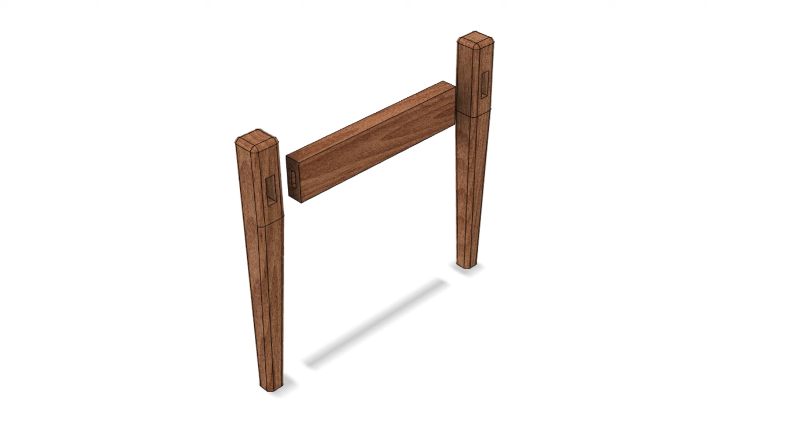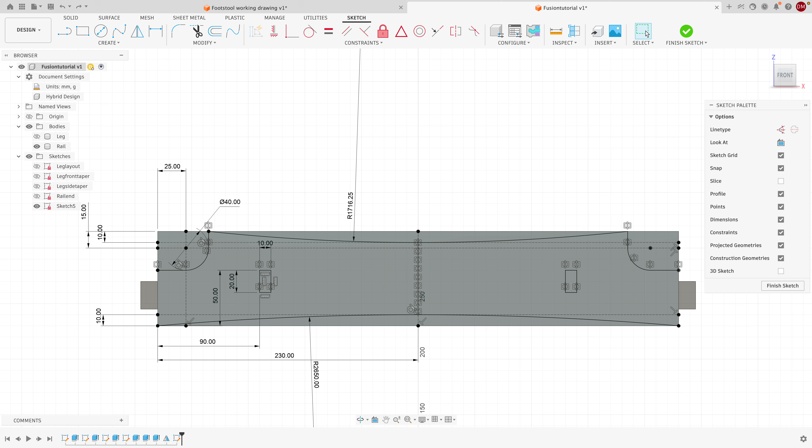In this tutorial, we're going to sketch the geometry for the front rail and for most of the back rail. By the end of this tutorial, your project, or at least this part of it, should look exactly like this on the screen.

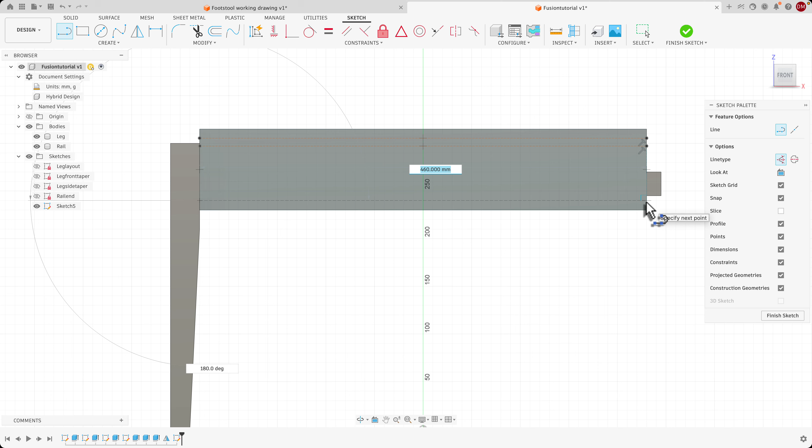So we're going to start off with a new sketch off the front face of the rail, and we want to start off with some construction lines. L for line. We want to go all the way across the rail, but we also want all of these lines to be either horizontal or vertical, so we're looking for 460 millimeters in length and at 0 degrees, or sometimes you'll see 180 degrees, so either 0 or 180. I've got two going across the top, one towards the bottom, and a vertical one at this end.

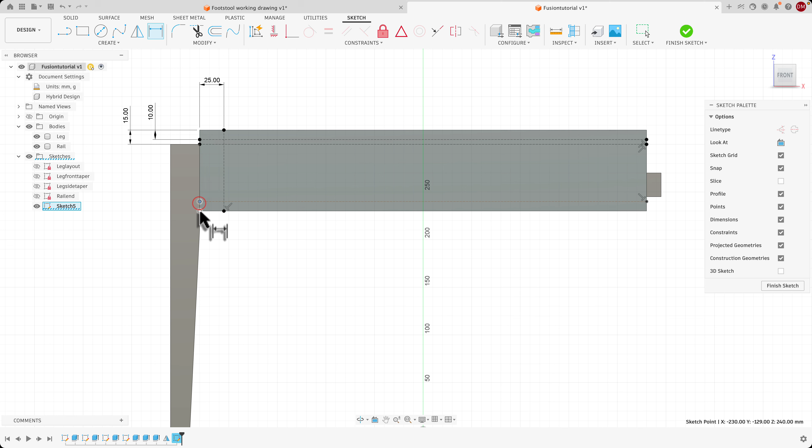Now I'm going to put some dimensions on, so D for dimension. This vertical one is 25 millimeters from the end. Then we've got the first of the horizontals at 10 millimeters, the second is 15. Now this is just because I've worked out this design, so these numbers are not set in stone, it's just the design I've worked out. When you're in the workshop, you'll see how these all sort of work out. And the bottom one is 10 as well.

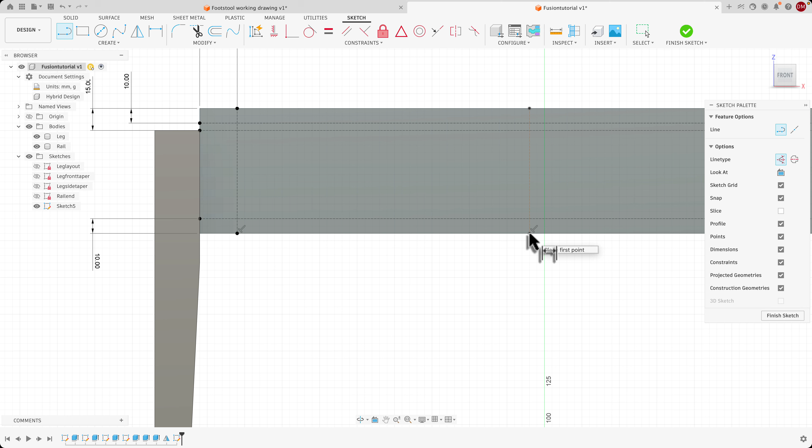I'm going to zoom into this end here because this is where most of what we're doing is going to be happening for now. Oh, actually, I just forgot, there's one more. So L for line, and again it's still a construction line. We want to line up the middle, it's going to be a mirror line because we're going to use that mirror function again. So D for dimension again, and if you remember it was 460 between shoulders, so we need this to be 230. It just saves us doubling up on the geometry that we're about to do.

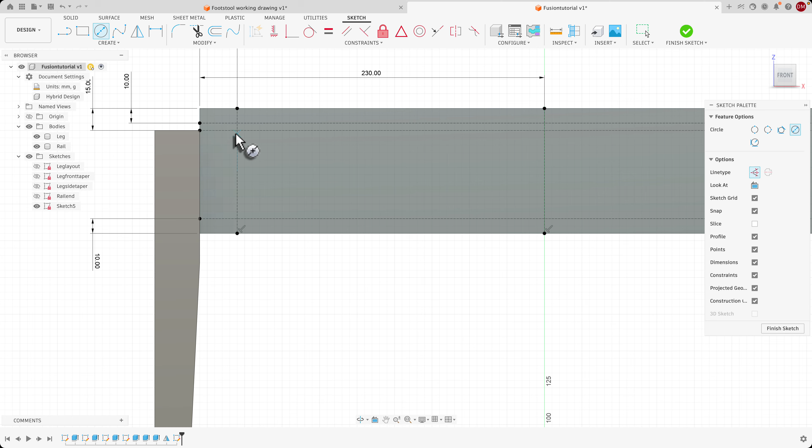First thing we need is a circle, so I could have just gone C for circle, and we want to draw this circle off - I'm going to zoom in a little bit more - so back to C for circle, where the 15 millimeter and the 25 millimeter line intersect. And it is going to be, and I'm going to have to change that, the line type as well, that is going to be 40.

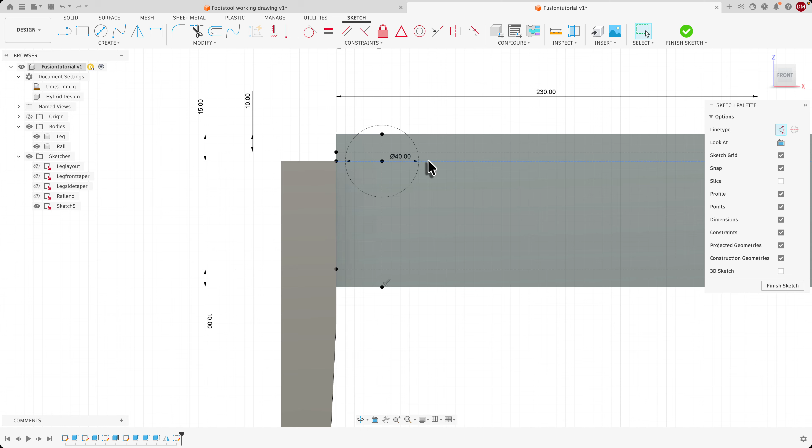Now, because it's still set for construction, let's just select that and turn that off because we're finished with our construction lines now. So we've got a couple more lines to draw here. L for line, we want to go from that point there and go up vertically - let's just make sure that we're not doing construction lines - and then we want to go from this point here and go across horizontally.

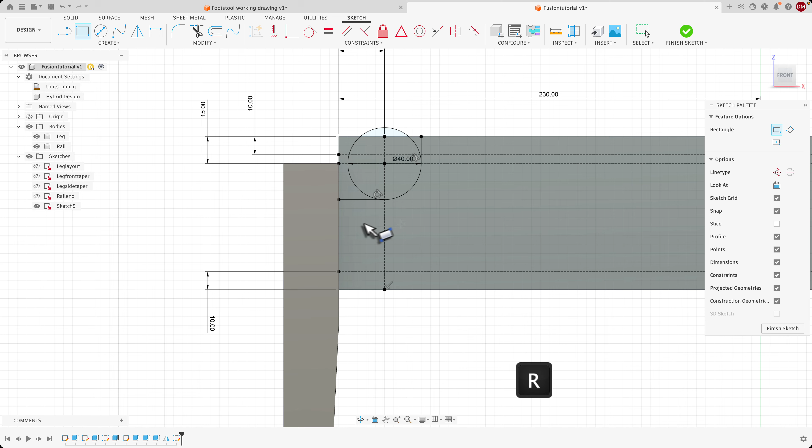The other thing that we want is a rectangle for our through mortise for our inner rails. So R for rectangle, and we want the top of our mortise to line up with this line here. So what we can do is hover over it, come across, and then draw our rectangle, and it's going to be 20, tab, 10, enter. I'm just going to tidy those up a little bit - yeah, that's what I want, make that a little bit tighter. And then we might as well define that.

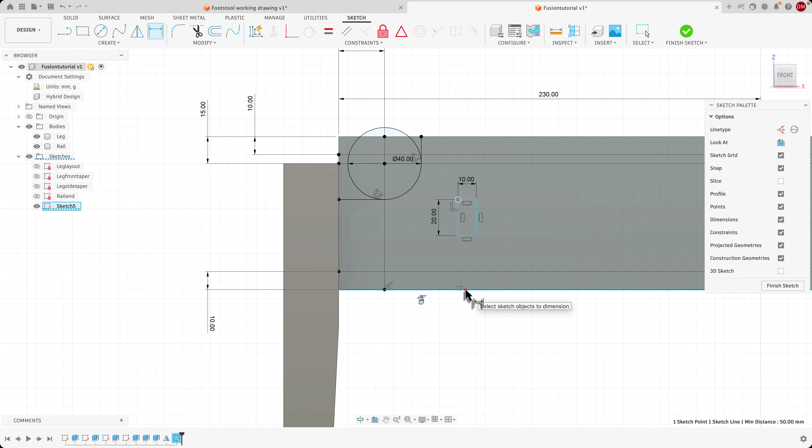So that particular distance there is going to be 50 up from the bottom. So D for dimension, we'll go - actually I don't like it when it does that, it goes around the wrong way - so I'm just going to press escape. D for dimension, if I actually go from the bottom, if it lets me, up to the top.

So 50, and then we want it to be 90 in from the edge. So that point there, and we'll make that 90.

So that's fully defined. Now we want to trim out excess geometry. So T for trim. And on this circle here, there's geometry that we don't need. Now we might get to a point - no, it's fine.

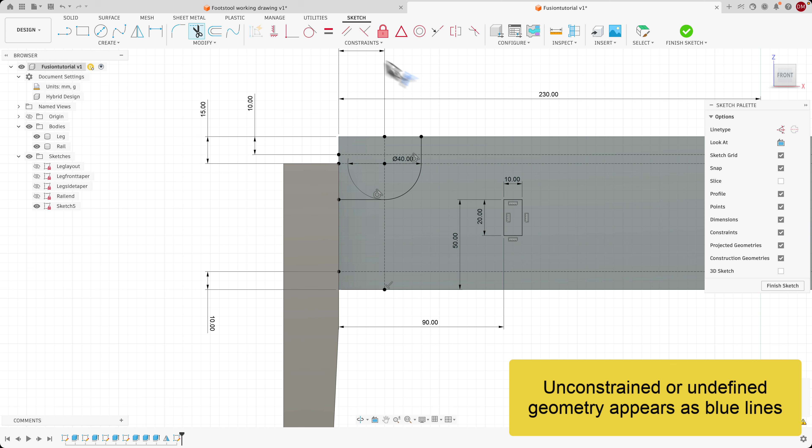Sometimes it can become unconstrained, which means you might see a blue line there. If that happens, don't worry about it too much. A really cool, fairly recent new feature for Fusion is, if you get lines that for whatever reason aren't constrained but you're not sure how to constrain them, you can come up here and auto constrain. That can be really good for neatly constraining your sketches, and it makes it easier later if you want to change something.

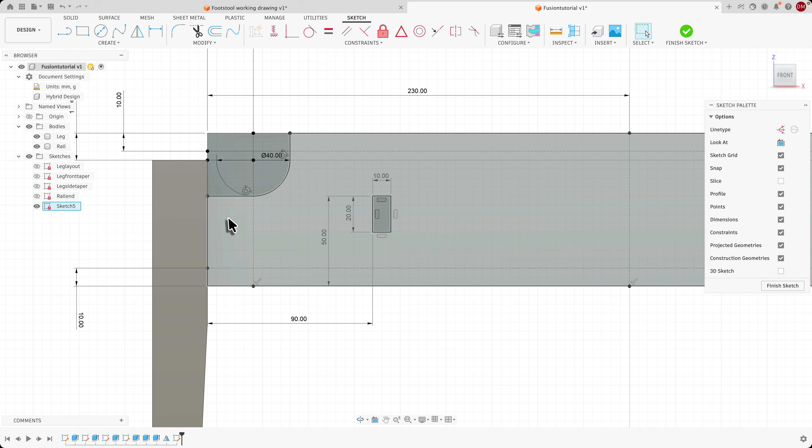All right, so this is where the mirror function is going to come in handy. What I'm going to do is select a whole lot of geometry. In fact, I've got to go to mirror first. So mirror, and then we just start selecting what we want to mirror.

So there should be 3 line segments there. And then if you just click and drag over this, you've got that rectangle as well. And the mirror line is our middle line down here.

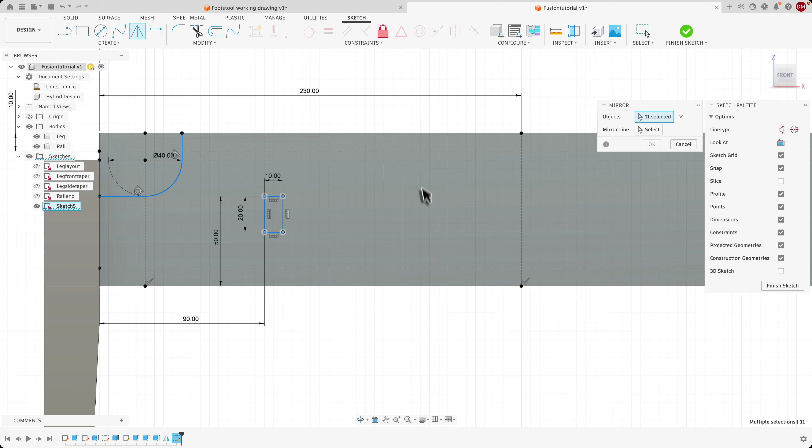But what I'm going to do is just zoom out so you can see exactly what we're about to do. We'll select our mirror line. And there you go - it's just mirrored all of the geometry over on the other side, saved us doing it twice. So we can go OK.

Now I'll zoom back in again. I want to try to keep it all on the screen if I can. Now we want to create the top and bottom curve.

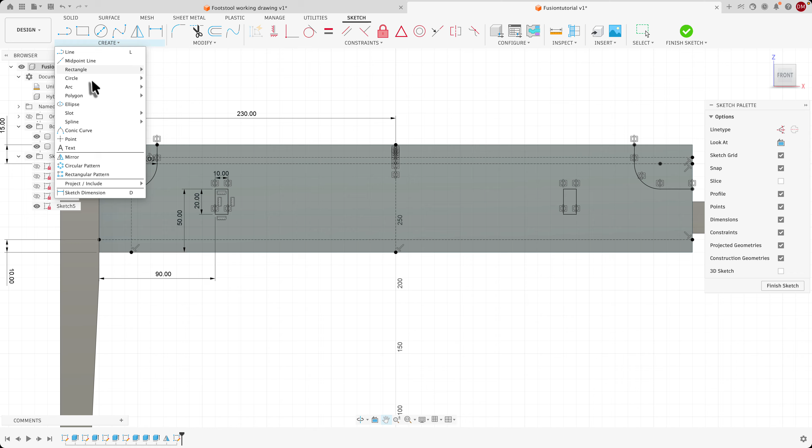Well, it's an arc, a 3-point arc. And I want to go - the bottom curve, I want to go from that corner to that corner. So it should show 460. And then I want to hit that intersection in the middle there.

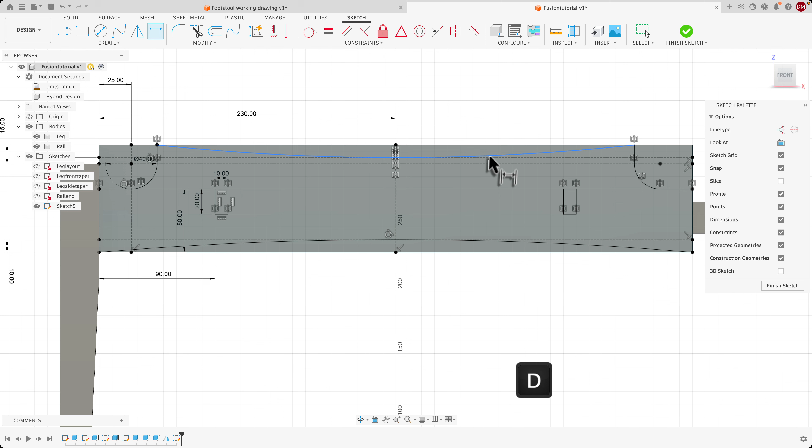Now for the top one, I want to go from that corner there, or that point there, to that point there, and hit this point here where our 10mm from the top line comes in. Press escape, D for dimension. To constrain this line, we just need to put a dimension on it.

1716.25 is the radius. You can see the curves for the top and the bottom - they are actually a little bit different. I'll show you the dimension for the radius for the bottom. So the radius for the bottom is 2650, and it's 1716 for the top.

Basically, the amount of the curve is 10mm - that's how much the seat drops down into the frame, and the curve comes up 10mm at the bottom. But you can see that the curves have differing lengths on them.

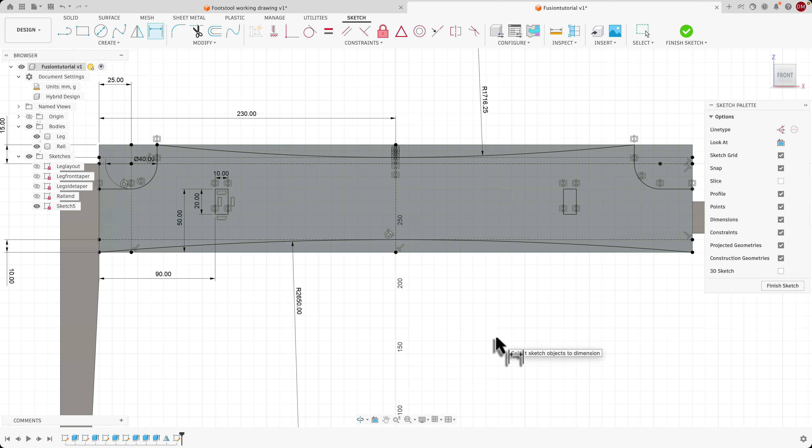That's basically all we need to do for this sketch. We will come back to this sketch later because we've got to add a little bit of geometry for the rear rail, but this is probably the most complicated sketch in the project by a long shot. So it's good to get that one out of the way early on.